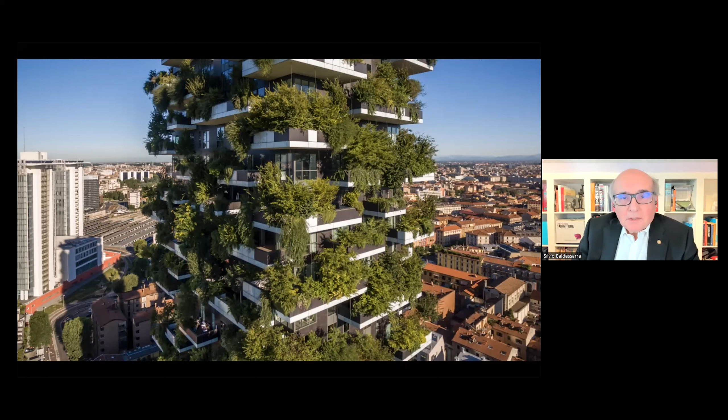Our speaker today, Thomas Auer, is partner of Transsolar Stuttgart. The climate engineering practice has received international attention over the last 3 decades and is working on all scales, from single buildings to urban neighborhoods.

As professor and chair of building technology and climate responsive design at the Department of Architecture of TU Munich, he focuses on a holistic design approach. From buildings and cities, it is crucial to recognize the sustainability goals of the EU, as well as the reduction of substantial CO2 emissions in the building sector as defining parameters.

Thomas and Transsolar have always advocated an understanding of energy efficiency that goes beyond technology. They develop holistic concepts that incorporate the urban and regional scale. The overall objective of this approach is to create maximum comfort in the interior as well as in the exterior of the built environment while minimizing the use of resources at the same time.

Thomas works in interdisciplinary teams and has established a 3-step approach comprising space design, building performance design, and infrastructure design. Welcome today to Thomas Auer, who will be presenting Lost in Transformation.

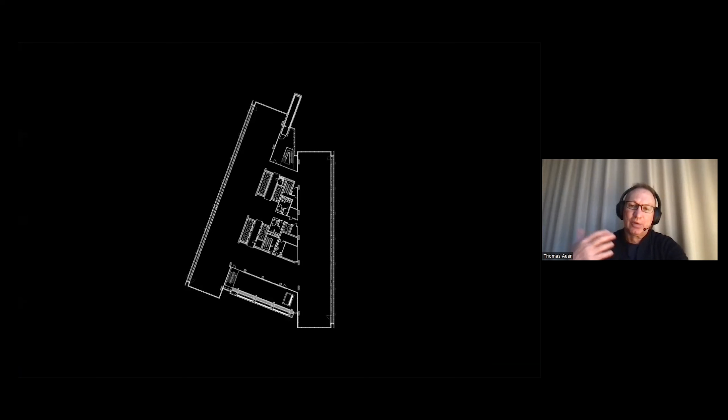So this became the driver: how can we maximize the use of passive solar energy in building operation? So we ended up with a kind of twin tower with two high-rise bars, one facing east, one facing west. The shape has been given by the site, by various parameters, but due to this kind of V shape of these two towers...

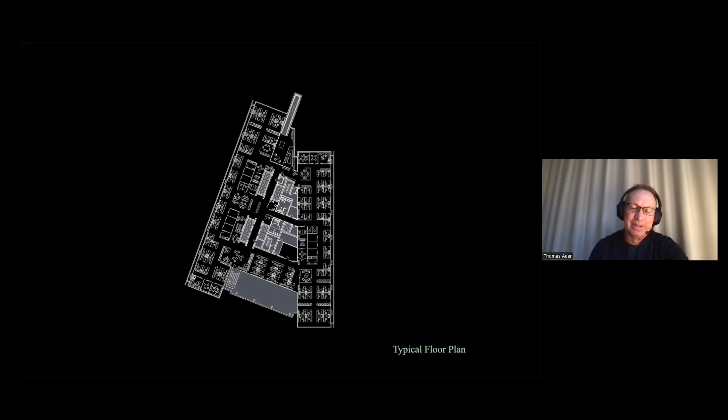there is a kind of leftover space, which we called the winter garden. So in section, this is how we operate the building in winter. We have an 18-story tower on a 3-story podium, and we've divided the 18-story tower into what we call 6-story neighborhoods — so we have three 6-story winter gardens.

In winter, we get outside air into the winter garden and condition this outside air to 10 degrees C, 50 Fahrenheit. So we condition this winter garden in winter only to 10 degrees C, so that when the sun comes out, it further heats up the air, which we then distribute, heated by the sun, into the depth of the floor plate. We have radiant heating on the north side.

We have a chimney where we take the air into the basement, where we have a heat recovery system. I don't want to go into the details, but we have almost 300 boreholes, geothermal boreholes, under the building. With the heat pump, we provide 50% of the heating demand through our radiant system, which is embedded in the concrete slab. So we have a 30 centimeter, 1 foot thick slab with hydronic tubing embedded in the core of the slab to provide radiant heating.

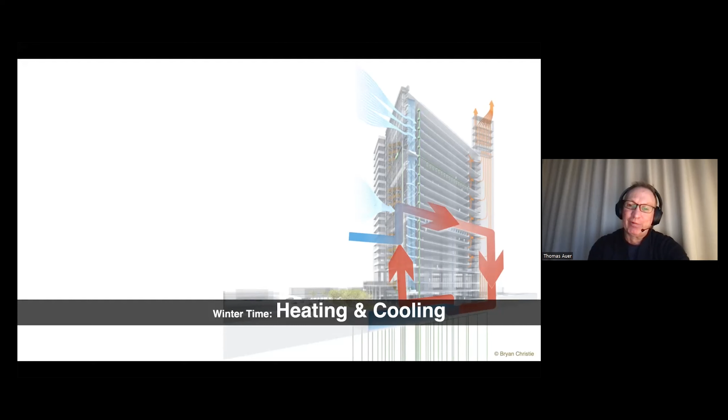In summer, when we don't need heat recovery anymore, we use this chimney as a solar chimney to drive natural ventilation, to exhaust naturally. We use the geothermal system for cooling purposes, running cold water through the slab. We open this southern facade so that we get basically outdoor conditions in those winter gardens. So that's the whole strategy.

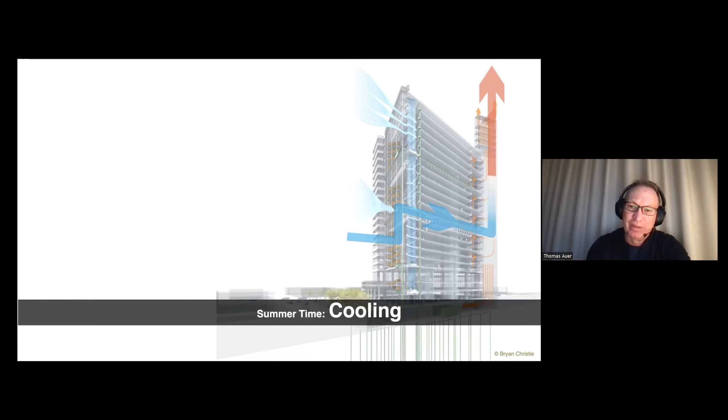It's pretty straightforward — this is the winter garden, and this is basically the mechanical room of the building. For the office spaces, there is no other mechanical room for mechanical ventilation or air handling units. The supply air units are integrated into this bench you see on the bottom right, and behind the panels on the left side are the units that take air from the winter garden and distribute it through a raised floor plenum. Then we have a water feature in the background, which provides humidification.

To the east and west, we get climate control by a double facade. The double facade has the insulating layer on the outside, the single glazed layer on the inside, and a Venetian shading device in the facade corridor. Because of the double facade, we could manage to have operable windows for natural ventilation. I think it has big advantages in terms of building physics — I don't want to go into the details, but let me say one thing.

It's just in such a cold climate, it's not true that we are able to manage a temperature difference from minus 35 or minus 30 degrees outside to plus 20 inside in a thickness of something like 4 inches of a glass facade. So you always have cold bridges, you always get condensation, you always get mold growth in those single facade systems. Not single glass, but single facade systems. Because of the depth of the facade, we could deal with these building physics issues.

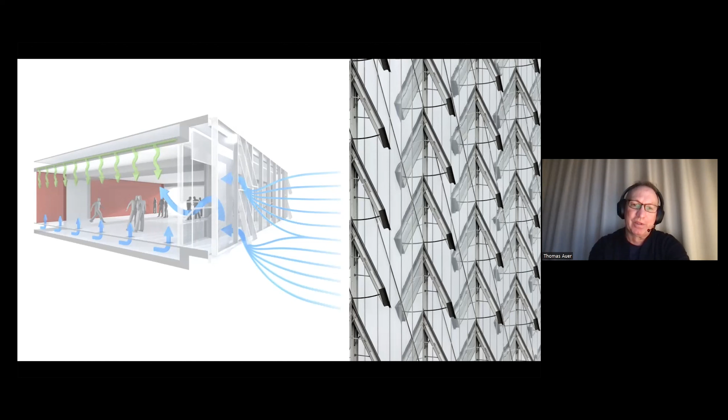So what does it mean? What we are very proud of is that all workstations are exposed to daylight and to natural ventilation. Manitoba Hydro has measured 1.25 fewer sick days in this building compared to their other facilities. And they've monitored, already in the 3rd year of operation, that they get half as many calls for too hot or too cold compared to their other facilities. This is very interesting.

Now we can certainly have discussions about why, but it's all speculation. We don't really know why. But it's interesting because we provide heating and cooling not with the ventilation system.

All year long we supply air at 18 degrees C, and we heat and cool the space by the radiant system, which is embedded in a 1 foot thick slab. It's so slow reacting that if someone complains about high temperatures, it would take a day or two to correct the temperature by 1 or 2 degrees. It's so slow reacting that there is basically no possibility to interfere.

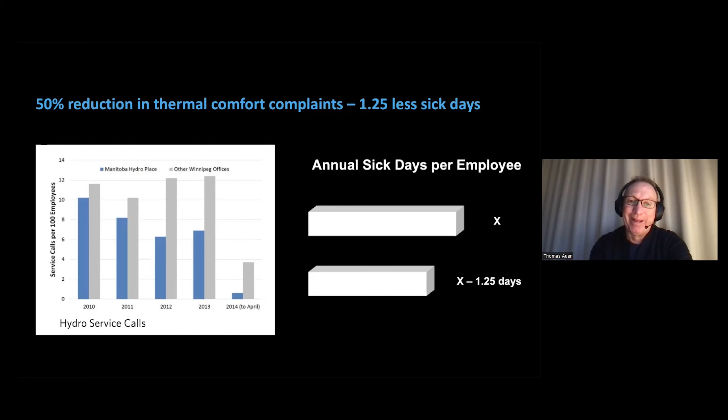Whereas the other buildings are fully air conditioned, and there's a thermostat where people can say now it's too hot, reduce the temperature down to 24, and then an air conditioner kicks in. So that's very interesting: despite the fact that we have basically no control, and especially no individual control, we have half as many complaints about too hot or too cold.

In terms of energy, MNECB, which was the energy code at the time, was 258 kilowatt hours per square meter per year. Our modeling in design, our projection, showed 88 kilowatt hours per square meter per year. So this is when we started construction.

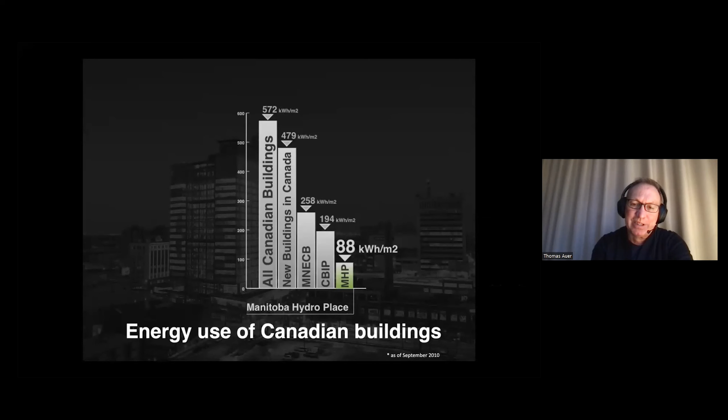And then after final completion — you know this problem, people move into a building and it's not really finished — but anyway, when they moved into this building, we monitored it over a period of 2 years. You see here the results.

We measured the energy numbers in September 2010 and then October 2010, always looking at the previous year. The green line represents the 88 kilowatt hours of our simulation model. At the first full set of data in September 2010, we had what we call a performance gap of almost 100%. The building used almost twice as much energy as predicted.

It took us the full 2 years to get the building to operate as designed. We had one hydronic issue with several reasons, and everything else was like a bucket list of 100 or more small things. You have to find them.

You really have to dig deep into the systems — a sensor measuring the wrong temperature, a routine that's just not correct, a sensor that's not connected, a valve that doesn't close, etc. You need to find those, and it took us 2 years. So that was kind of frustrating. Why did it take 2 years?

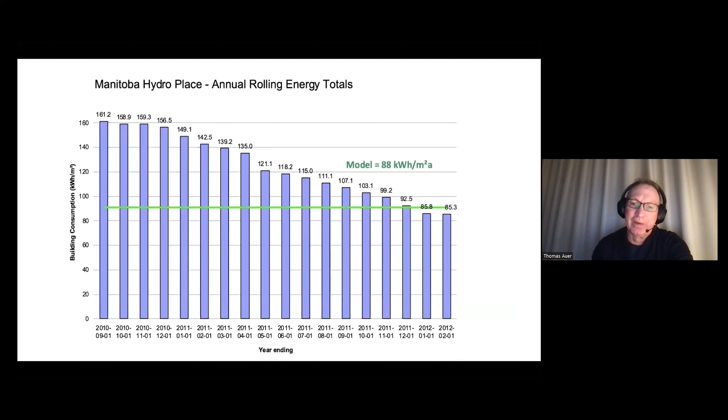First of all, we were certainly proud to get the building to work as designed, and in general we are very proud of this building, I have to say this. It's certainly one of the most important projects of Transsolar, one of, if not the most important project for me. It's a very successful project. And the question I raise is, why does it take so long?

Then we dug in at the university into this issue of performance gap, asking whether it's an issue specific to a Transsolar building — are our buildings too complicated — or is it a general issue of the industry? We found several studies from Germany, from England, tons of studies in the US. And this study from the Royal Institute of British Architects, called Better Spaces for Learning, looked into almost 60,000 school buildings all over Europe and found that 95% do not work as designed.

95%. So we have to conclude we have a big quality control issue in our industry. We have a big issue with performance gap, a big issue with all kinds of things. Now, what do we do? How do we solve this?

So the question is, is this a role model? Are the buildings too complicated? Again, the client, Manitoba Hydro, is very happy with this building. We are extremely happy with this building. Everybody is very happy with this building. However, is it a good role model?

We always believed that through what we call adaptive facades, climate responsive design, however you want to call it, we can create transparency in a very smart way, so that we reach a higher level of efficiency. And now we need to question whether the buildings are too complicated, whether this maximizing efficiency is an appropriate and the right approach and goal.

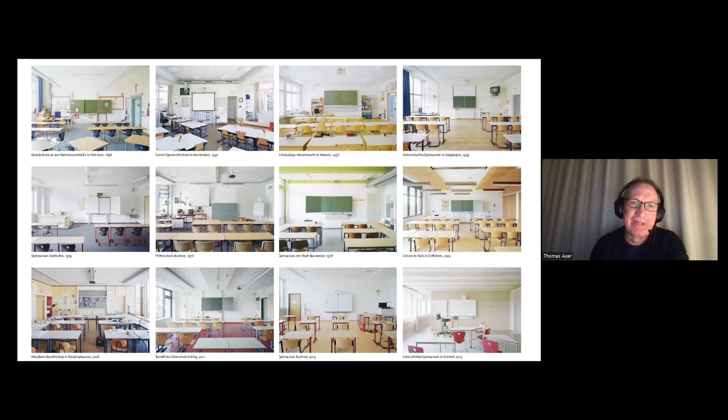So thick brick walls. And it's still not common that we mechanically ventilate, air condition and cool school buildings in Germany in our very moderate climate, where over the summer school is closed for a period of 6 weeks. Of all buildings without mechanical cooling, we measured the best comfort in this building in summer. Of all buildings without mechanical ventilation, we measured the best air quality in this building.

With the smallest fenestration ratio, we have the best and most evenly distributed daylight due to these tall windows and the tall space. So we recognize that height matters. Height matters in terms of air quality, height matters in terms of daylight, but height matters also in terms of thermal mass coming from these walls being exposed to the space.

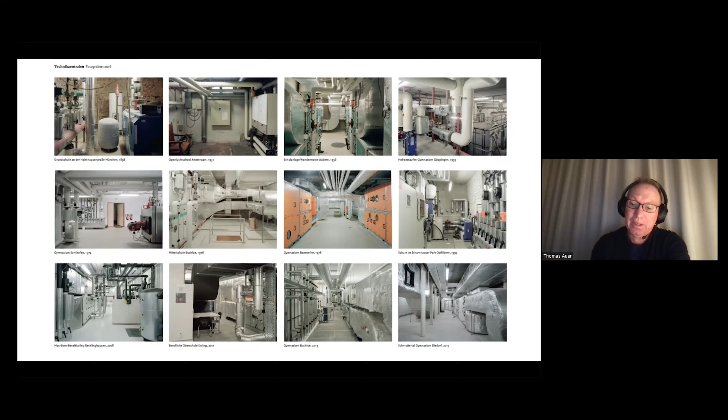The Theodor Fischer building, the upper left building, now got renovated for the first time. So after 120 years, it went for the first time through a major renovation. None of us believes that the system on the bottom right is still working as designed in 10 or 20 years from now. So this is not robust. So what do we do?

And then my colleague at TUM, Florian Nagler, a very well-known architect in Germany, said, Thomas, let's start a research project. There were many, it was not just him and me. There were many companies, institutes from the university involved. And we called it Einfach bauen, build simple. How can we reduce complexity in design? And we said, let's focus on 3 materials, and maybe let's start with comparing space and materials.

But we also said we want to build monolithic again. We want to reduce layers. We don't want to glue insulation onto a concrete wall. No composites of materials, just single materials, which we can then bring back into the cycle. So the whole idea of circularity was included, but particularly reducing everything we don't really need. And then there was this question.

So Florian and his chair were looking into sections, saying, if we build a facade nowadays in Europe out of concrete, we have a load-bearing concrete wall, and we glue insulation onto it. No real solutions, again, for how to separate it later on at the end of life. Then we have a shading device. Because of the shading device, we create a cold bridge. If we really want to fix this cold bridge, we use a vacuum insulation panel. Nobody knows how long the vacuum is going to last.

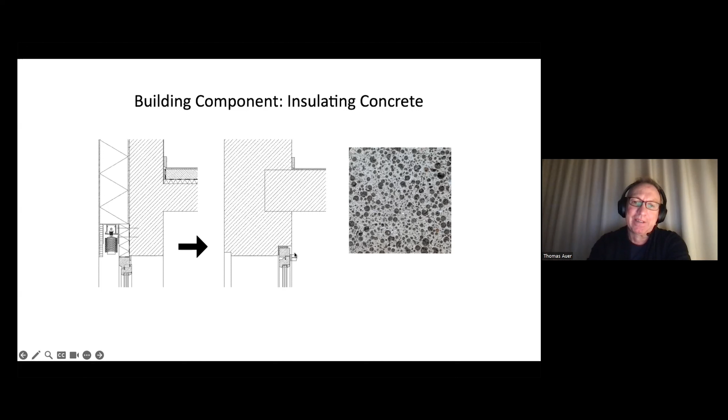And then what's very typical in Germany, not so typical in North America, on the inside we have a concrete slab. And on top of the concrete slab, we have like a 2-inch insulation and a 2-inch concrete screed, a floating screed on top of it. And we do this for acoustic reasons. But if we're honest, the main reason is that we run all the piping, all the electrical wiring below this screed, in this insulation layer, just to hide it. And so he did the same for timber. He did the same for insulating brick.

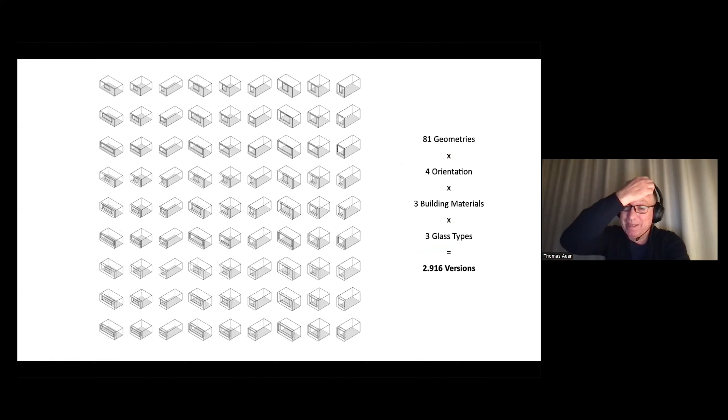And then we did studies on optimizing space. So we did studies looking at 81 geometries. So what's the best ratio between width and depth and also height, knowing that if you go taller, the window becomes taller, and then you have daylight going deeper into your space. So with less glass, you achieve better, more evenly distributed daylight.

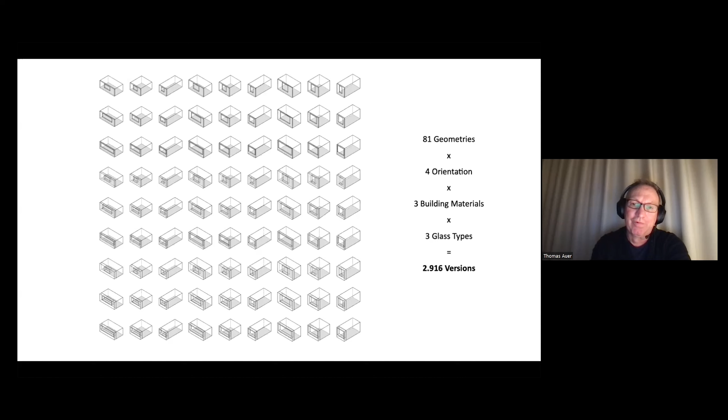So we ended up with 81 geometries and 4 orientations and 3 different building materials and 3 different glass types. So with almost 3,000 versions, we modeled to find an optimum. And then we were also, as a team, going through a life cycle analysis. I think I'll jump over this because I don't want to go too much into the details.

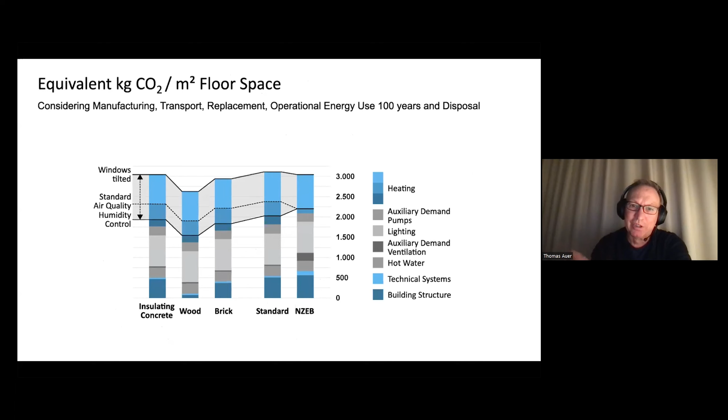We didn't want to have a concrete beam on top of the window because the concrete beam would be a cold bridge. Then we would need to glue insulation on it and so on. We wanted to avoid all of this. So we said no mix of materials.

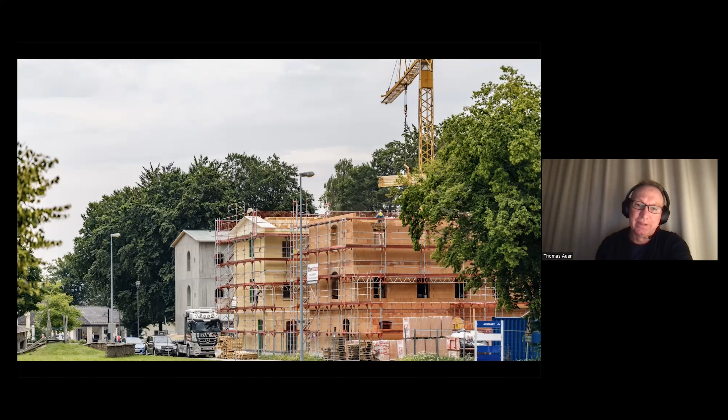Everything remains pure. And so therefore also the concrete, there was no reinforcement in the concrete. And therefore you can't get a beam if you don't have steel in your concrete. So it's not reinforced insulating concrete, this wall, and therefore you also see these arch type windows. Here the proof that when they poured this insulating concrete, there was no reinforcement in this formwork.

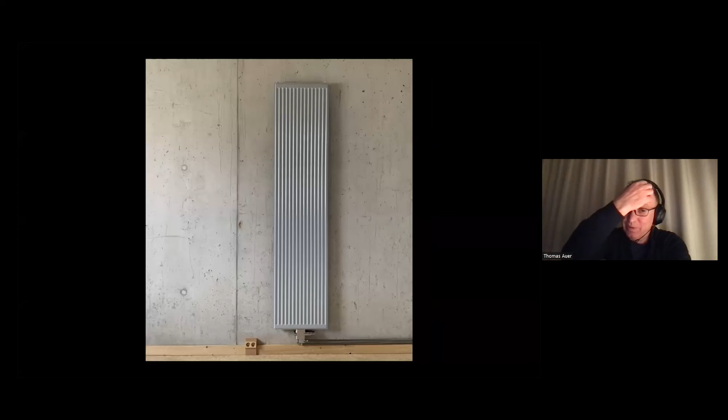As a result, if you don't hide the installation, the electrical wiring and the piping under your screed, everything becomes exposed. But that became a whole theory, at least here in Europe, but also I think in North America, from everything I heard. And in Switzerland, they say all systems need to be accessible.

The expected lifetime of these pipes for this radiator is something like 40 years. The expected lifetime of a building is 100 years. So you need to replace the piping within the lifetime of the building, and therefore it has to be accessible. If it's below a screed, you have to rip out the screed to get to your piping. The same with the electrical wiring, the same with all the systems.

We used only natural material. It's a sisal we put on the floor, which we needed for the acoustics. We needed it because we didn't have a screed. We didn't put in a screed. Therefore, we needed to have a soft floor finish. Again, those are the 3 buildings.

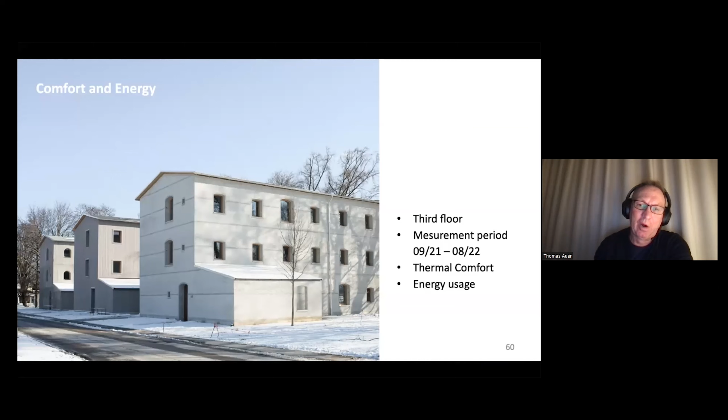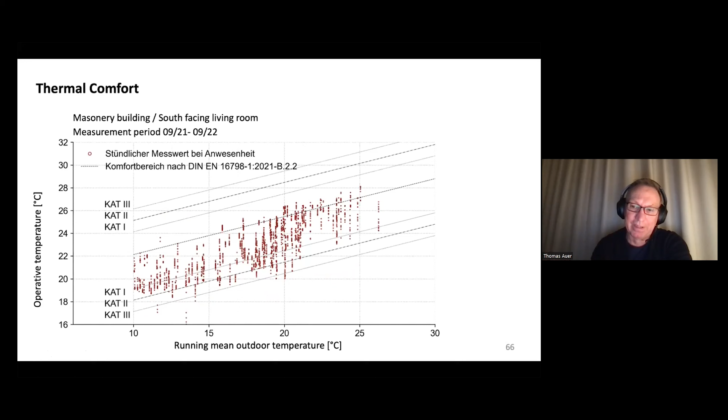And we use this now to argue in Germany with the central government that for all public buildings, we have to use the European code and not this German code. In terms of energy, we measured 2 apartments in each building in detail, and you see the heating demand of those 6 apartments. Now it's, let's say, statistically a very low amount of apartments, of users. But anyway, it's certainly an indication.

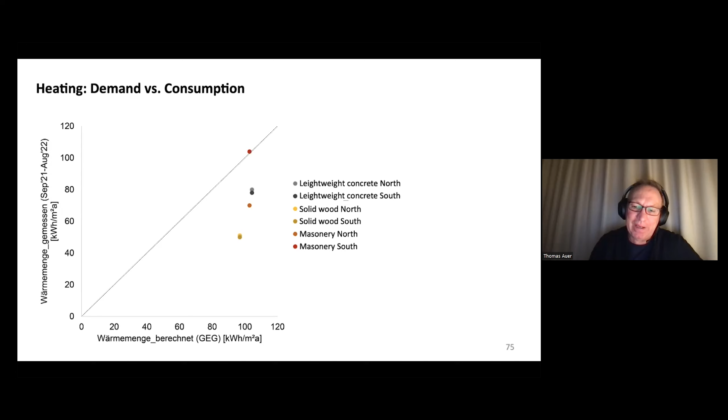Everything which is below, we basically have a negative performance gap. And this is quite interesting. In 5 out of 6 apartments, and this was before the energy crisis as a result of the Ukraine war, this was the winter before, we have a negative performance gap, even though we designed those 3 buildings towards the minimum energy requirements based on code. So we said we don't do anything beyond that. Just what we are mandatory to do. But the buildings use less energy.

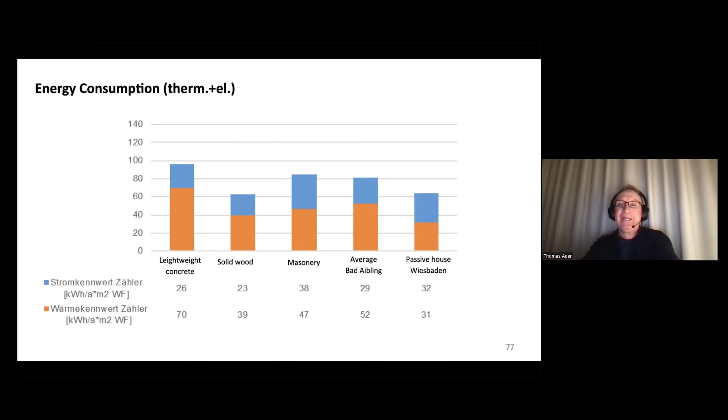And then, interestingly, there's a passive house district, so highest energy efficient standards, in Wiesbaden, and they published their measured energy numbers. And you see that in this mass timber building, the energy consumption is even lower, or let's say plus minus the same as the passive house. So we really question whether efficiency will get us anywhere. Is efficiency really a solution?

We measured also the ventilation, how people ventilate, etc., and then recognized that their ventilation strategy is very reasonable. And there's also a sociologist involved, and we had questionnaires. We asked people, and they all say the space is so airy, so spacey, they have the feeling the air quality is always good, so they don't feel they constantly need to open the window. And in combination with the low temperatures, this is the effect. So we don't see a performance gap. It's actually the opposite. But it was never designed towards efficiency.

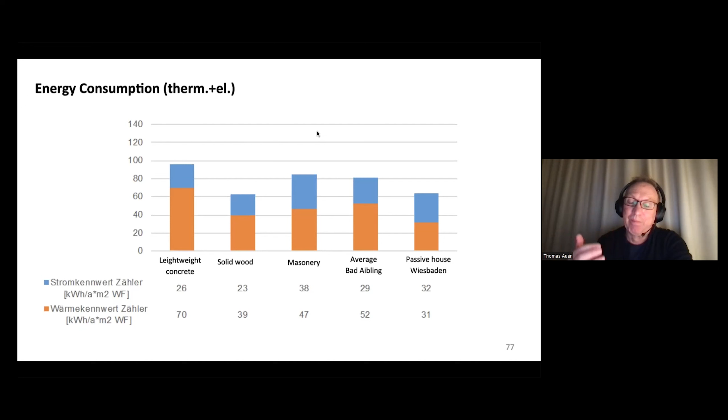Also in terms of space, we gave them more height. So again, you see here those 3 buildings. So it's not hundreds of users, it's not thousands of users, but it's certainly an indication. So what are potential role models then if efficiency is not the only one? And we have to get beyond the glass architecture, that's something I think we can certainly conclude. And embodied carbon became more and more important, and of course we have to take embodied carbon into account.

Let me show you a couple of projects which go into the right direction, which might give us an indication. I'm not sure if we have the answer, but the simplicity, this Einfach bauen, is certainly something that guides into the right direction. But when we wanted to translate this in a dense urban environment, we had big issues because of the thick walls and square meters of floor area we lose, big issues because of zoning bylaws and extended floor to ceiling heights.

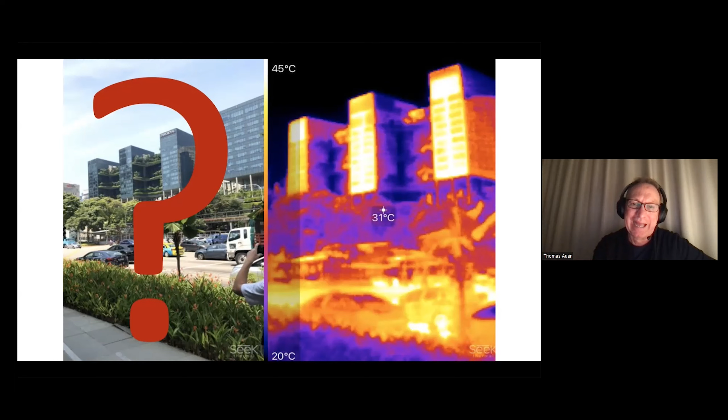So we really need to question. I mean, I love the Boeri building, and it's certainly a message, but we really need to question whether we can replace the function of green in public realm by green we put into the facades. Green belongs into the ground, and the public realm and the facade green does provide cooling, but it doesn't provide shading, whereas a tree provides cooling and shade, and we need to provide shade in public realm.

And then finally, let me finish with comfort, talking about comfort. So all these approaches I have shown you are not providing us the answer. But I think all the approaches are important and valid, that we continue trying to rethink an architectural approach that is truly sustainable for the future.

Like, we need a new type of international style, which is based on local materials, and a new type of international aesthetic, which is based on local materials, reused materials, bio-based materials. All of this we have to integrate into our architectural approach.

It's not one single answer. This is what we know for sure. I don't have the answer. I don't have the project where I say this is the future. But I think all aspects we have to consider, and I'm convinced there will not be one answer. But one thing I'm very convinced of is that we have to rethink comfort.

And we are doing research about this also at the university. We started something we call Sense Lab. So it's a box where we can provide all kinds of conditions and then put test subjects, like we do studies mainly with students, I have to say.

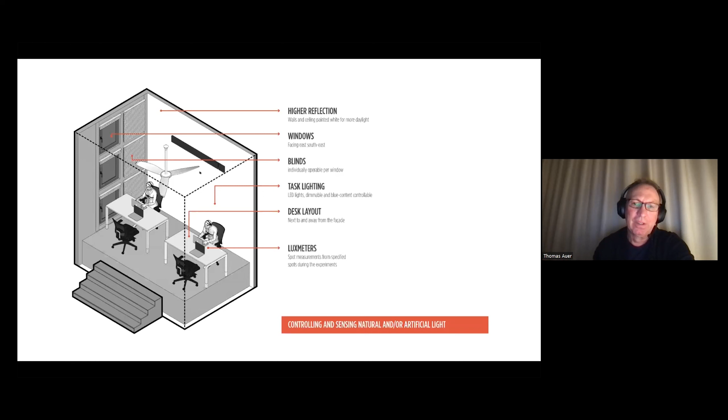But we put test subjects into those rooms and use biosignals to try to find a correlation between conditions and well-being and health. So that's a little bit what we aim for. So we use all kinds of biosignals. This is the Sense Lab, this is the space.

And in the old thermal comfort research, all the Fanger, the usual ASHRAE standards, not the adaptive comfort standards, but the regular ASHRAE standards, are based on this research, which always used questionnaires. So they put people in a test chamber at stable conditions, no change of conditions. And then after a while, they came out and said, how did I feel?

And so this was used to find how people perceive comfort. I mean, that's the point. How do we perceive comfort? But you can't have changing conditions. So that's why we ended up with a very narrow comfort band, and with the narrative of very stable conditions throughout the day, throughout the year. And our hypothesis is that more dynamic, changing conditions are actually more healthy for people.

And we let people stay there for 8 hours a day, which also almost nobody did before. It was always a short-term stay until you get to steady state conditions, and then you were going through the questionnaire.